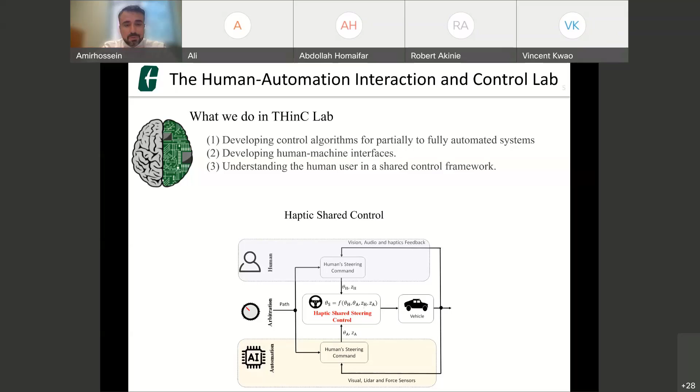The motivation behind this project is that human automation teaming is getting more and more interest because of the great promise autonomous vehicles have. For military applications, autonomous vehicles can increase personnel safety and mission performance. For commercial applications, we hope they can increase road safety, mobility, and quality of life.

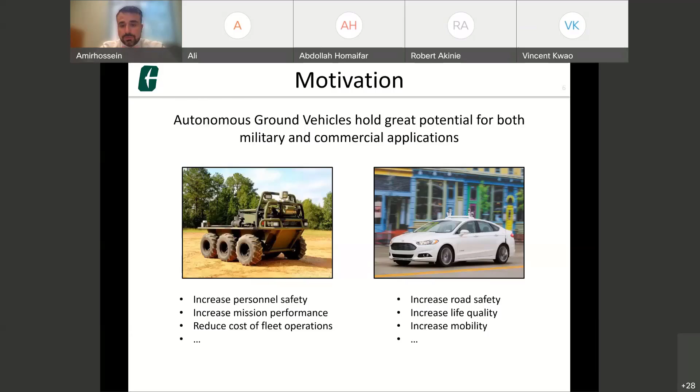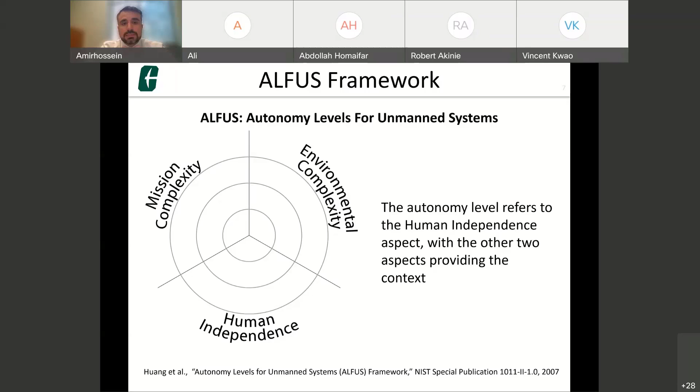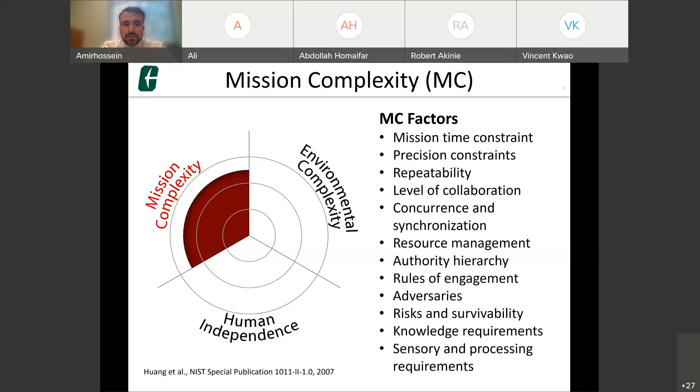There are many frameworks studying levels of autonomy. One is ALFUS, Autonomy Levels for Unmanned Systems. In ALFUS, we look at autonomy level with regard to human independence—how independent the algorithm is of a human user—and how well it addresses mission and environmental complexity. Mission complexity includes time constraints, precision constraints, level of collaboration, resource management, and risks. Environmental complexity includes noise, the dynamic nature of where the vehicle operates, obstacles and their size, whether obstacles are moving, terrain, and light—all of which pose challenges in designing an autonomous vehicle or autonomy algorithm.

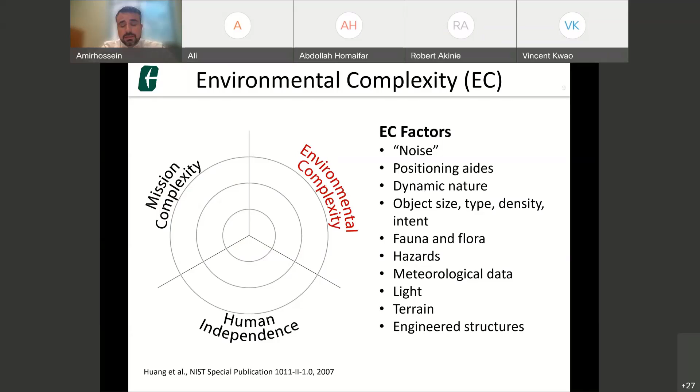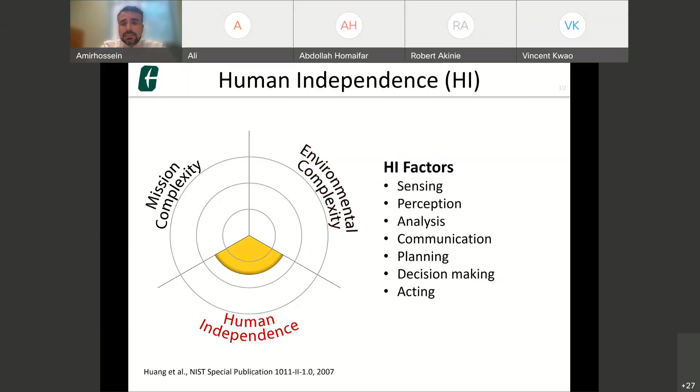With regard to human independence, we want our algorithm to be capable of accurate sensing, good perception, analysis, communication, and decision-making. So the goal for us as control and autonomy engineers is to design an algorithm that is independent of the human user and can address as much mission and environmental complexity as possible.

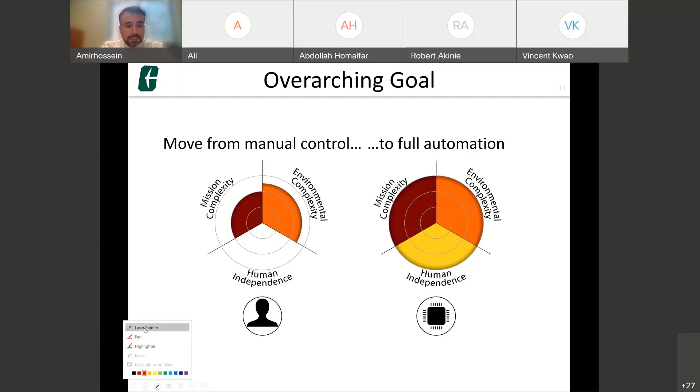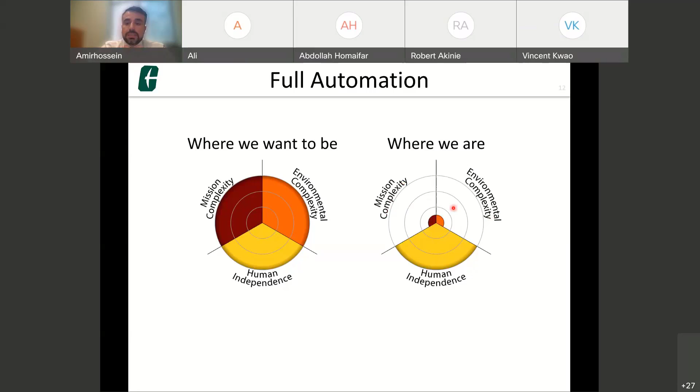However, what we have so far—our full automation systems—can only address a very small fraction of the problems regarding mission and environmental complexity. While we can work on improving our algorithms, it's important to also consider another solution: using the human user as a resource, an off-board resource, to resolve challenges that arise when autonomy is working in a new environment.

That's when the research question comes to mind: how should we merge the best of the two agents? How should we use human capabilities such as perception, judgment, and experience dealing with new environments, combined with the best of what automation can provide, such as precision?

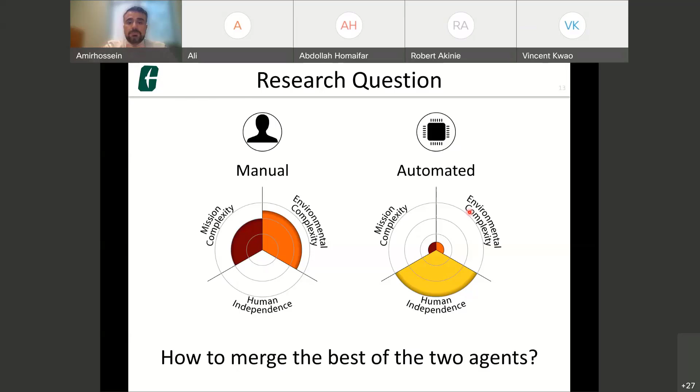I need to emphasize that adding human and automation may not necessarily lead to better performance, because humans and automation may see the world differently, and therefore may end up in conflicted scenarios. Because of these conflicts, we need to understand how to resolve them between human and automation, and how control should be transitioned between the two, or how control should be combined between human and automation.

For that reason, different shared control paradigms have been developed, mainly differing in the mechanism used for transferring control between the human and the automation system. The simplest paradigm is supervisory control, where the automation has full control of the vehicle and the human is basically supervising its actions. We don't really consider this a shared control paradigm, because the human and automation are not at the same level—they are not doing the same task; the human is just supervising the control.

One of the shared control paradigms is the switch-based paradigm. In this paradigm we can have two options. The first option is called active safety, where the human has control of the vehicle or the task. Here, with the vehicle and the task, we are always considering the steering of the vehicle.

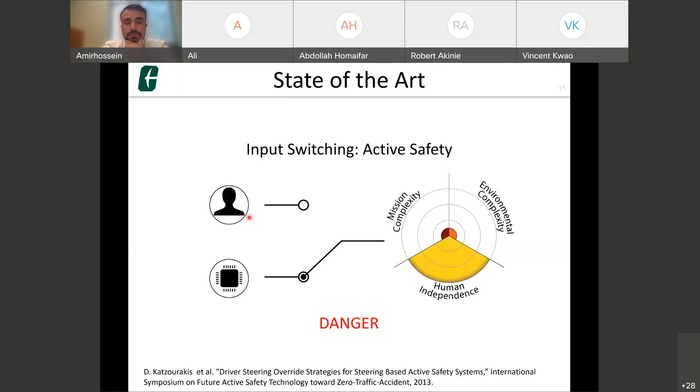So human normally has control of the vehicle, but in a dangerous situation, the controller will come and take control from the human. An example of this is the ABS brake system.

Another paradigm is what we call autopilot, where basically the automation is primarily responsible for performing the task. However, in a dangerous situation, the human can jump into the loop and take control from the automation, and that's what happens with cruise control.

The problem with these switch-based control paradigms is that it has been shown the transfer time between human and automation is a little bit long. Also, if one agent is not in the loop, it will be hard for that agent to understand the other agent has some problems or faults, and then jump in and take control from the faulty agent.

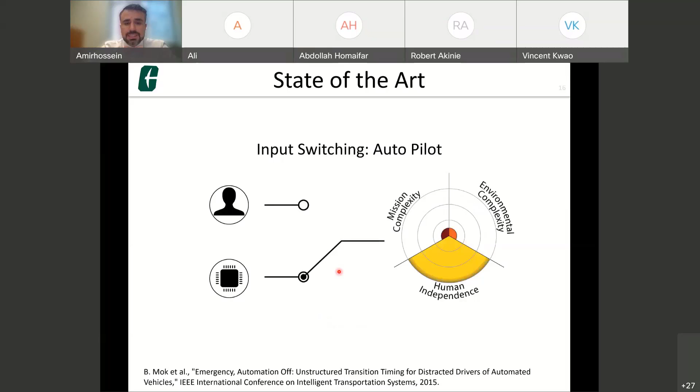So there is some misuse in using this switch-based control, and that's why recently people are thinking about combining human and automation's control commands continuously. One of the approaches people use to combine human and automation control commands is a paradigm called input mixing shared control.

In the input mixing shared control paradigm, the human command and the automation commands will mix through some weighted function, and that weighted function can be an adaptive function that goes between human and automation.

The problem here is that defining this alpha is normally done by some third party algorithm. Again, you can imagine what if that algorithm is not programmed sufficiently for these new complex areas that we have.

Another problem is that since the human is not directly connected to the automation, the human needs some additional process to understand automation's desire from the feedback given by the system. So processing that may be a little bit time consuming for the human to understand what exactly automation wants to do.

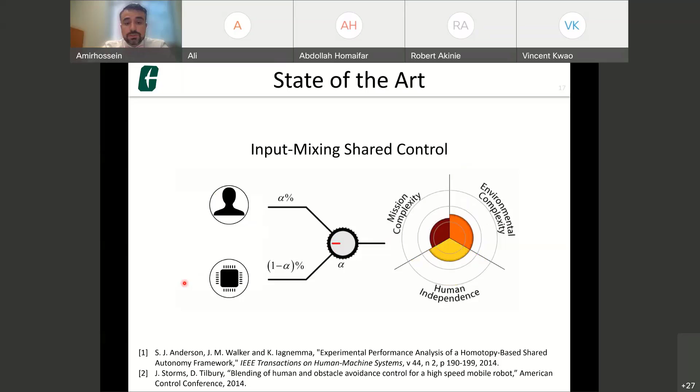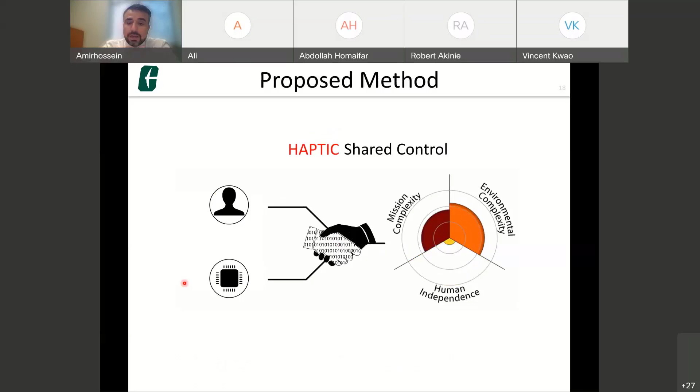That's why my research has been focused on the haptic shared control paradigm. In this paradigm, both human and automation apply their commands on the steering wheel.

The steering wheel, as a haptic interface, allows the human's and automation's dynamics to be coupled. This coupling allows us not only to apply our control commands, but also to sense what the other agent wants to do through the haptic feedback we get from the steering wheel.

Any questions? Yes, may I have one question? Sure. So basically with this mechanism, what you are doing in the previous slide, the blending mechanism you had, alpha was typically a constant value. Now you make alpha a sort of function of the haptic feedback. Is that what you're doing?

The difference is no. In the input mixing approach, alpha can be adaptive, can vary in time, but the mixing is happening in the vehicle, on board. What happens is the human has its own steering wheel, automation has its own steering wheel, and the steering commands of the human and the automation both go to the vehicle and get combined through some mechanism, and then the human gets this feedback back.

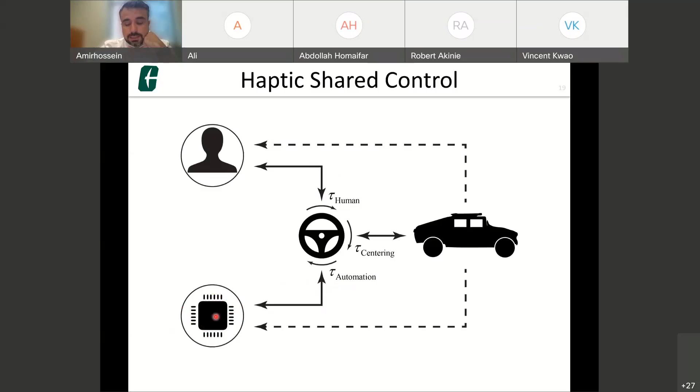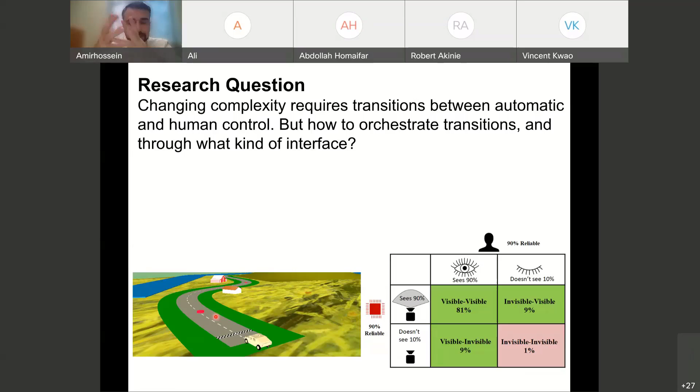So we are looking at automation here as, instead of having an infinite impedance or a motion source, we are looking at it as a source with a limited impedance. So the first question we wanted to ask ourselves is basically: when there is complexity in the system, and a need for transition of control between human and automation, because both human and automation are subjected to errors, which of these shared control paradigms is the best paradigm for us? So our first objective was quantifying the benefits of haptic shared control in comparison with alternative shared control paradigms.

This transition of control is important because we are interested in scenarios where there is a need for transition. If you assume your human agent is 90% reliable and your automation is 90% reliable, for a task like obstacle avoidance, maybe 81% of the time both human and automation see the obstacles and can avoid them. But there's 18%, split 9% and 9%, where one of the agents is not capable of seeing or has some fault. There's even a 1% where an accident may happen, which is why the material of the vehicle should also be researched. But what we're doing is saying: if we design a very good, very intuitive shared control paradigm, we should be able to improve the performance of the system from 81% up to 99%, if our shared control paradigm works perfectly.

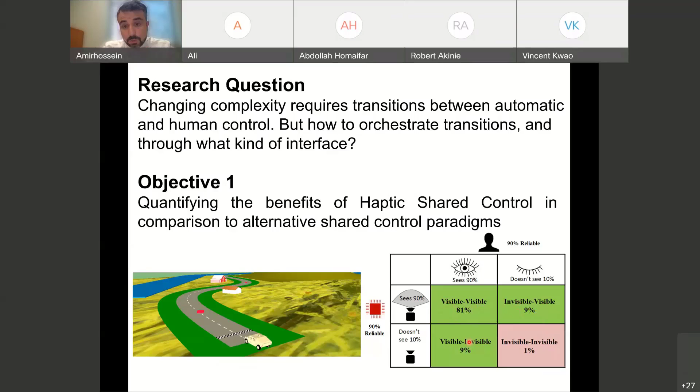For that reason, we did a case study using a fixed-base driving simulator. This simulator has a motor and a motorized steering wheel, where the automation's commands come through the motor and control the steering wheel. The steering wheel has an encoder and some torque sensors. The torque sensor is a differential torque sensor that determines the difference between the torque applied by the motor and automation and the torque applied by the human, which tells you a bit about whether they are in agreement or disagreement.

If this differential torque is high, it means the two agents have some disagreement with each other. The task for our participants was to drive a vehicle, track the center line, but also avoid obstacles. The path is shown here, and this simulated model is built on the Simulink virtual reality toolbox.

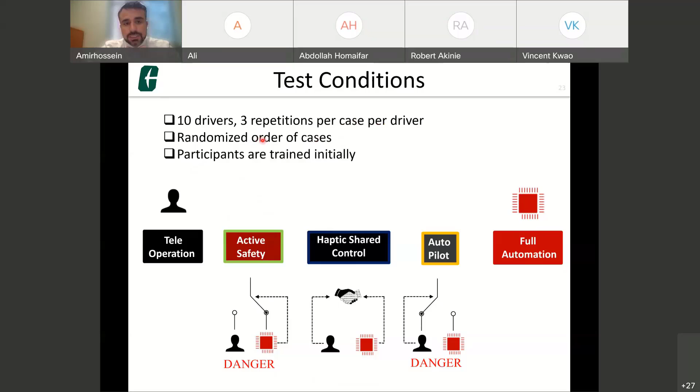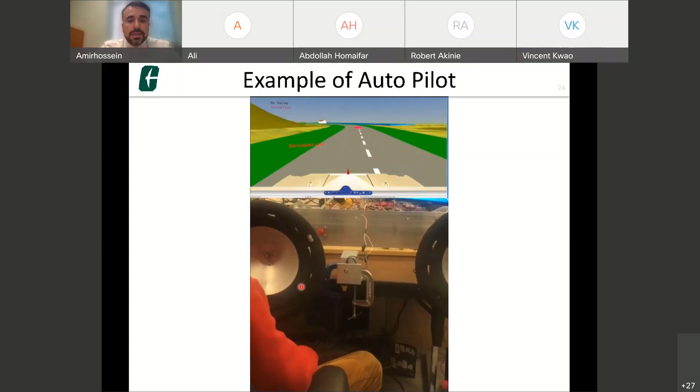Next, I want to show you an example of the autopilot case. Here the automation is in control of the steering wheel. But when a human wants to take control back, they can put their hands on the steering wheel and apply a quick jerk. This is a similar mechanism to what Tesla does, and the human can re-engage the automation by clicking a button. That's an example of the autopilot automation.

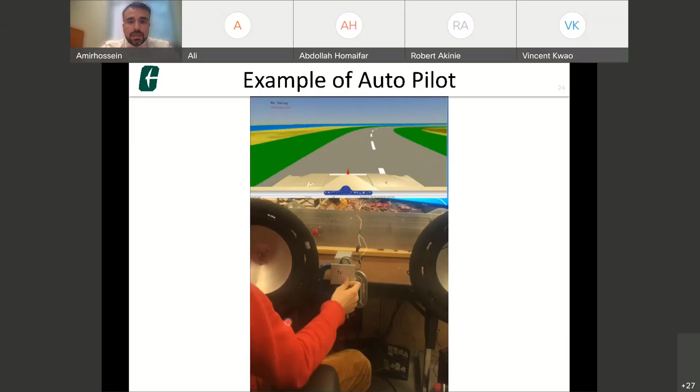Let me show it one more time: automation is on, controlling the vehicle, and whenever a human wants to take control, they apply a quick jerk, the automation goes off, the human clicks, and the automation comes back on, and then you try to come back to the center line and avoid the obstacles.

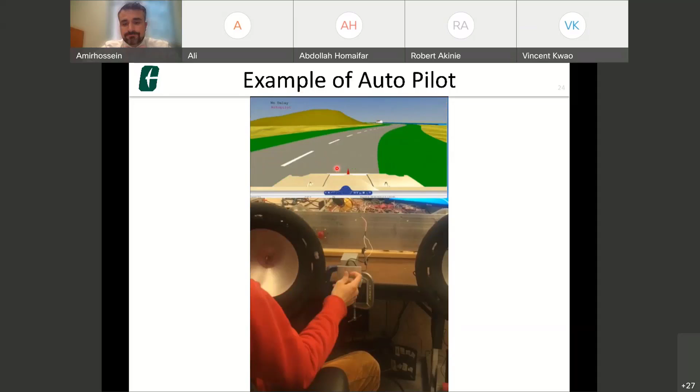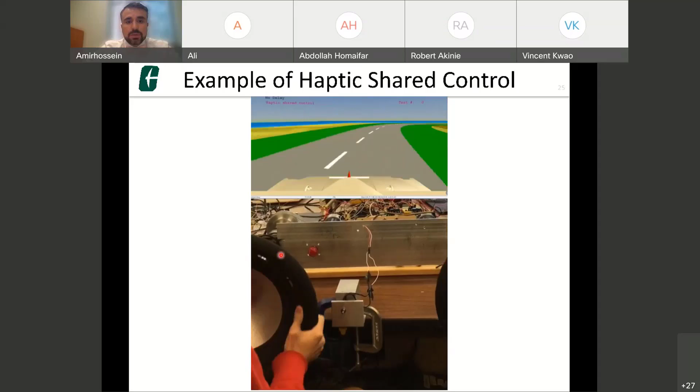This is an example of haptic shared control. It's very hard to see, but in the haptic shared control, there's a motor that applies torque on the steering wheel, while the human's hand is also on the steering wheel. Whenever the human wants to take control, they can tighten up their muscles and take control from the automation system.

The automation is always running in the background, so there is no engagement and disengagement here. Because we wanted to model faults in human and automation, we considered that there are 10 obstacles on the path: 6 of them visible to both human and automation, 2 visible only to the automation, and 2 visible only to the human, where we don't pass that obstacle information to the automation system.

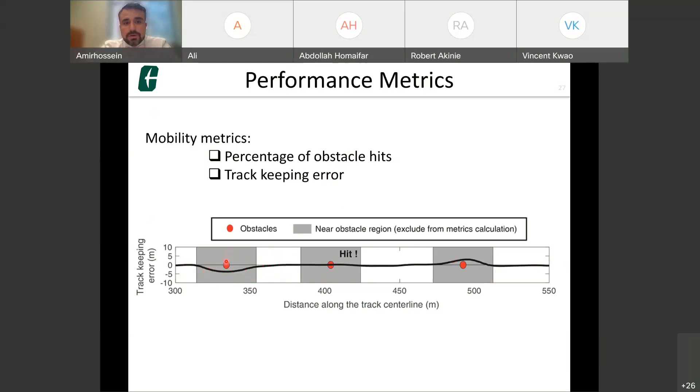Comparing results, we looked at the hit percentage - the number of obstacles that were hit - and the error. For the fully manual, teleoperation, and fully automated conditions, since we engineered 2 out of 10 obstacles to be invisible to them, we get a 20% hit rate.

However, with shared control paradigms, we saw that in the haptic shared control, the number of obstacle hits is significantly smaller than the others, especially compared to active safety. This star indicates a statistically significant difference based on an ANOVA analysis.

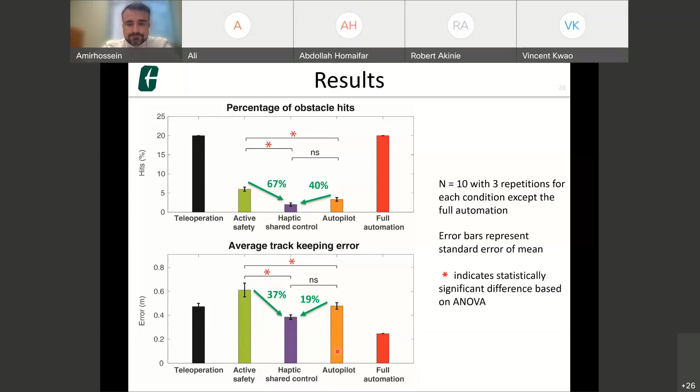For the error, fully automation has the lowest error, but comparing the three shared control paradigms, the haptic shared control has a smaller error than active safety and autopilot. This shows that adding automation through haptic displays can improve lane keeping and obstacle avoidance.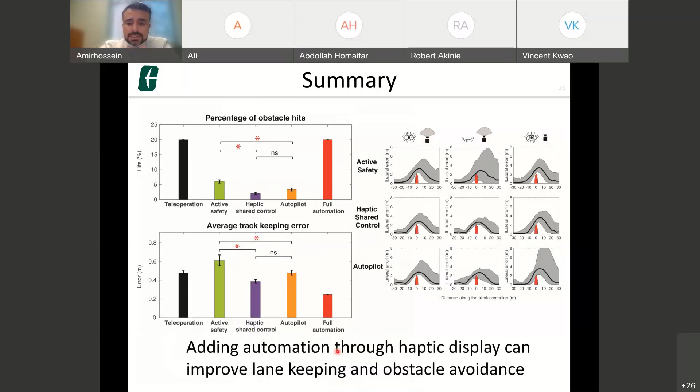But we were interested to look more carefully at how human and automation interact in these shared control paradigms, and I want you to look at these results.

These results show the paths of all participants going through an obstacle that is visible to both human and automation in the active safety condition. We plotted all participant paths for each case: active safety, haptic shared control, and autopilot.

Sorry, do you have any questions? No? Okay.

And then for the cases when there is no fault, when there is a human fault where the human cannot see the obstacle, and when there is an automation fault - one specific case I want you to pay attention to is the autopilot.

Autopilot is the case when automation is in control and the human takes control from the automation if they realize it isn't performing correctly. There is a low approaching distance for this case, meaning the human was not really prepared to take control - they realized a little too late that the automation had a fault and they needed to take over. This shows up as a low approaching distance and a high confidence area here.

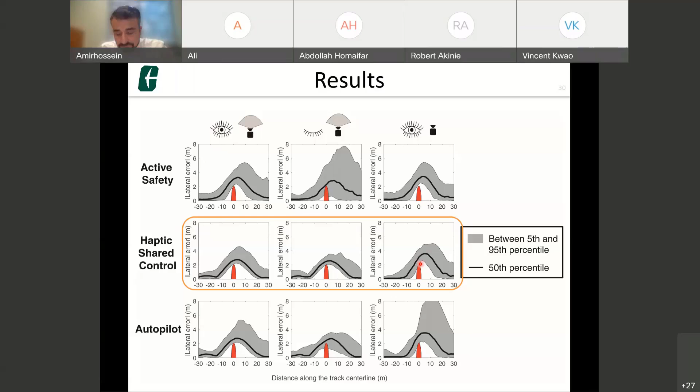For that reason, and we also realized that looking at the case where the automation and human both see the obstacle, but they may have different preferences on how to avoid it, it might be a dangerous situation. Previously we always thought that if the obstacle is visible to both human and automation, that's an easy case to solve. But when we were doing the simulation, we realized there are cases where the human decides to go from the left and the automation decides to go to the right. Because of the haptic shared control paradigm structure, those torques cancel each other out, and the vehicle may hit the obstacle.

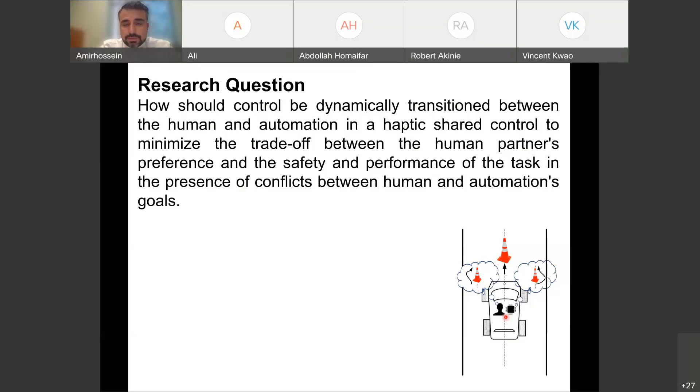That's why we thought, okay, let's rethink and design an adaptive haptic shared control paradigm. The research question for us was: within haptic shared control, how should we minimize the trade-off between what the human wants and the safety and performance of the task? The objective was to develop a modulating mechanism for the automation's impedance controller gains to enable dynamic transition of control authority between human and automation.

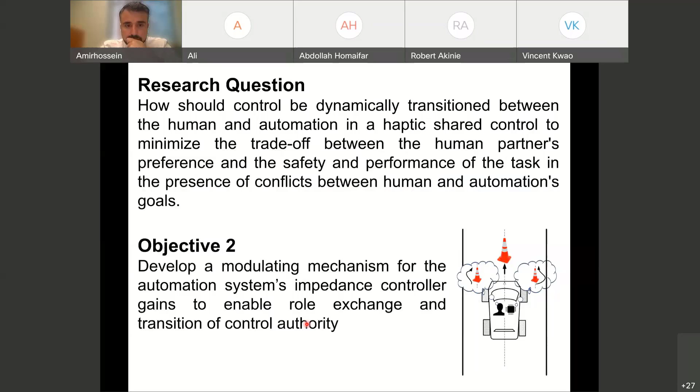So, sorry, may I have one question? So far, before this objective, the human was in control of how much haptic feedback is being applied. Now you're going to have an external algorithm to balance the human input and the automation input, correct? Yes. So I am gonna... okay.

Let me go through this slide and I'll answer you right now. In a haptic shared control paradigm, we have a motorized steering wheel where the human is controlling the steering wheel and automation is also controlling the steering wheel. Normally the automation controls it through some impedance controller, you can assume like a PID controller.

So what we did is consider the human as a two-level controller: a higher level controller, in the brain, where you determine your intent to go left or right, and a lower level, the biomechanics, where you apply the torque on the steering wheel. By modulating these gains, the stiffness and damping in the muscles, you can take control from the automation or yield it to the automation.

Previously, in the haptic shared control paradigm, we set the parameters of the automation system, the PID controller, as constant gains that didn't change. So if the human wants to take control, it should increase its gain ZH to be more than ZA. And if it wants to yield control back to automation, it should relax so ZH becomes smaller than ZA. This ZA was fixed.

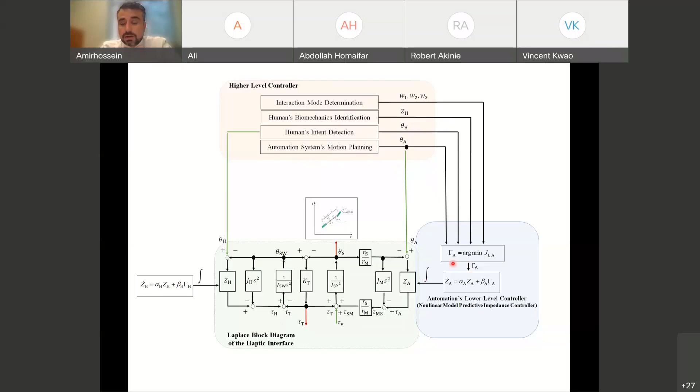Having this knowledge available, our goal was to determine gamma A, the optimal modulation policy. So the cost function that we defined here,

it has three terms. The first term focuses on how far the steering angle is different from the human. The second is how far the steering angle is different from automation. And then the question is what is the disagreement between the two agents, which is subjected to the dynamics of the human-automation interaction on the steering wheel.

You can imagine there are two possible interaction modes. When automation decides that WL1 is bigger than WL2, it gives more weight to the first term - it is basically in the assistive mode, trying to give control to the human. When it is in the active safety mode, WL2 becomes bigger than WL1.

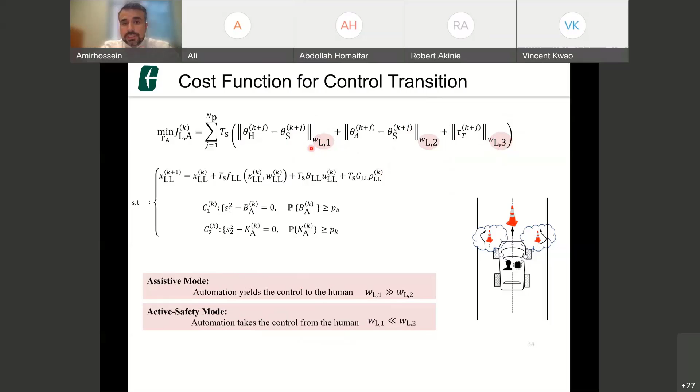For now we consider these weights as constant, but in the future we are hoping to determine some adaptive law for modulating or changing these W's adaptively as different scenarios continuously happen.

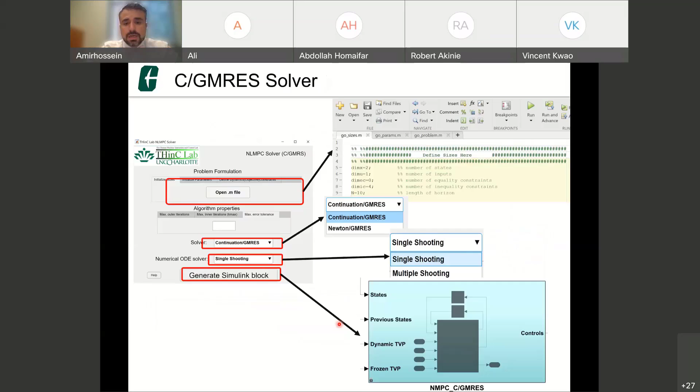We used C/GMRES, which is an iterative solver for solving nonlinear MPC problems. We adopted and solved our nonlinear problem using it.

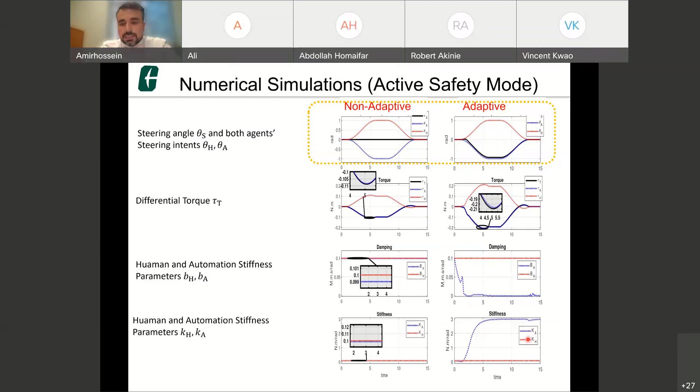We tested our algorithm and solver through a processor-in-the-loop test to make sure we could run it in real time. We looked at the horizon view and the iterations happening at C/GMRES, examining two cases.

We used two microcontrollers - Arduino Mega2560 and STM32F4 Discovery. Using both, most of the time we were able to run our algorithm in real time. There are two cases where the execution time is more than 1 millisecond, and we are assuming that if execution time is less than 1 millisecond, it is acceptable for us.

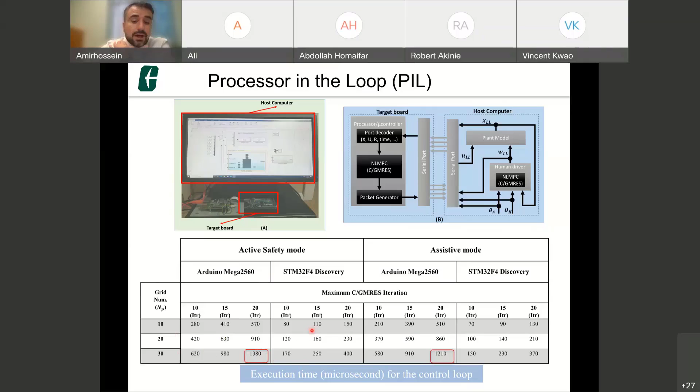But in the majority of the time, our solver was able to produce an optimal modulation policy in real time.

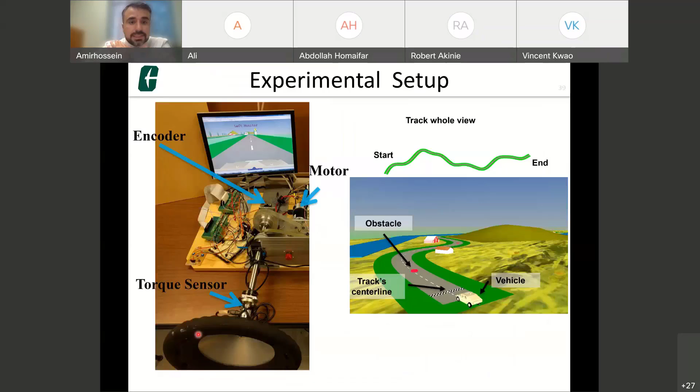We did some test studies, which we just recently started doing this last month. The problem and experimental setup are almost the same, and we decided to compare non-adaptive haptic shared control with adaptive haptic shared control. In the non-adaptive case, ZA is constant, but in adaptive, ZA changes with time. We had one driver, with one repetition per non-adaptive case and two repetitions per adaptive case. We again considered 10 obstacles: 6 are visible to both agents, 2 are only visible to automation, and 2 are only visible to the human.

Here, we used grip force as a proxy for human impedance, because we do not have a direct measurement of human impedance yet. Basically, if a human wants to take control, they are probably holding the steering wheel tighter, and if they want to yield control, they loosen up and hold the steering looser. The relationship between grip force and ZA is through this equation: when grip force is very small, meaning the human is not really holding the steering wheel, ZA is high, and when grip force is very big, ZA becomes very, very small.

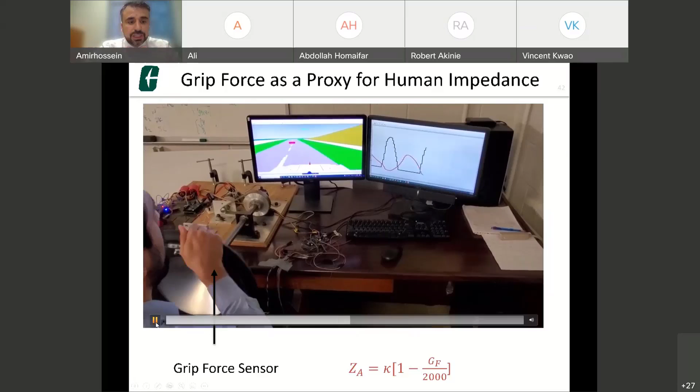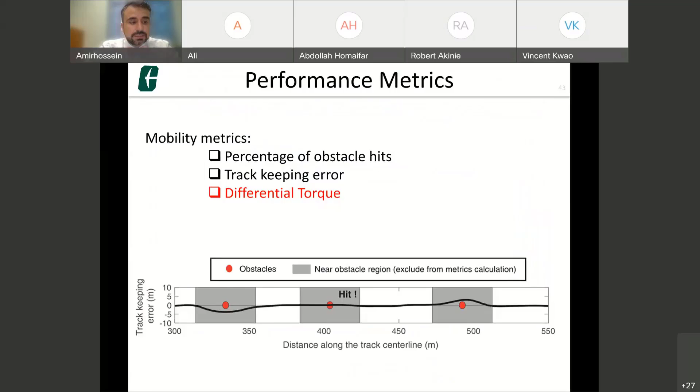Yeah, so we did this test again. Besides the other mobility metrics we had before, we're now looking at the differential torque. Looking at the results, when talking about non-adaptive haptic shared control, we saw that it had this low approaching distance, but this has been removed a little bit in the adaptive haptic shared control paradigm.

So I believe, as soon as the human understands that automation has some fault, they try to take control and hold the steering wheel very tight, and instead of fighting back, the automation understands that the human wants to take control. It reduces its involvement by reducing ZA, and that's why the human, without any fight, can control the steering of the vehicle, rather than needing to increase force and overcome this bias force.

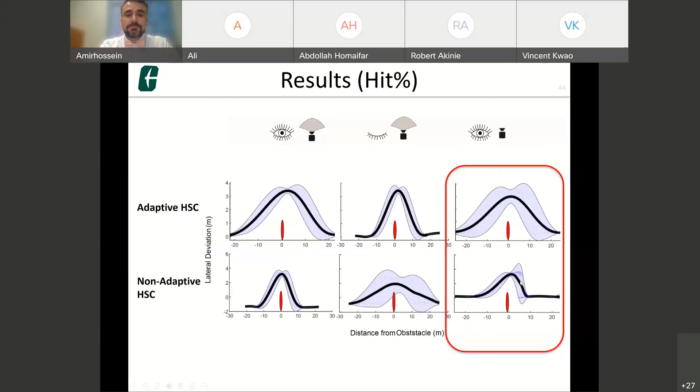Looking at the differential torque, we saw a significant difference when the obstacles are visible to both human and automation, between the adaptive haptic case and non-adaptive haptic case. We didn't see that much difference in the other two cases when there is a fault in one of the agents. We need to do more analysis on this matter and increase the number of subjects to more accurately see why the differential torque is not changing that much.

But in the adaptive case, when there is no fault, adaptive haptic shared control obviously has a much smaller differential torque, meaning there is less disagreement between human and the automation system.

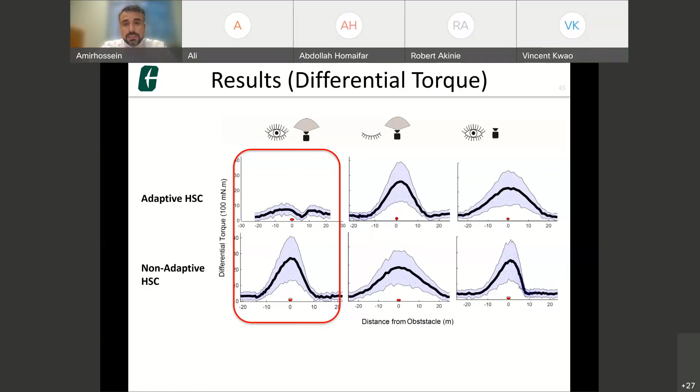As I said, there are a couple of directions we're currently working on. One is developing a more sophisticated model of human-automation interaction. Basically, you can model the human-machine interaction as x dot equals f plus g, where f is a nominal model of human-machine interaction, same as our mass-spring-damper, for instance. Then there is uncertainty in the model and in the variables of the human, which can be state, input, and parameter dependent. We are applying estimation approaches like unscented Kalman filter-based methods to identify our f and identify the parameters of the human model.

And then we also apply some learning-based approaches, like a Bayesian neural network, to characterize the uncertainty in the system. This is one of the projects we are currently working on.

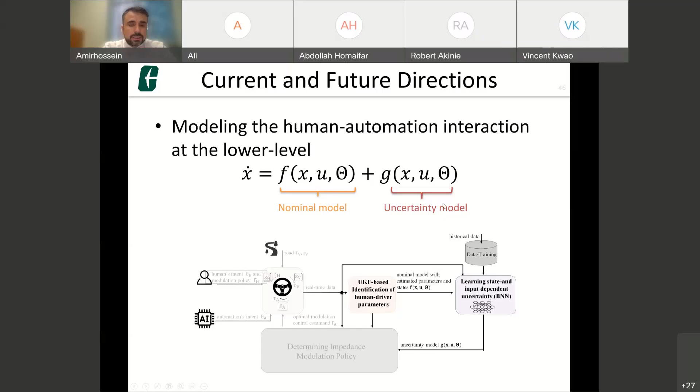The other project we're working on is studying the role of convention, meaning how human and automation basically interact with each other through repeated interaction. We assume this cost function for the automation system, but the human can have its own cost function, depending on how the human selects weights for its terms. The human can have selfish behavior, meaning they want to take control all the time, or selfless behavior, or neutral behavior. This behavior can also apply at a higher level when the human is deciding about their intents.

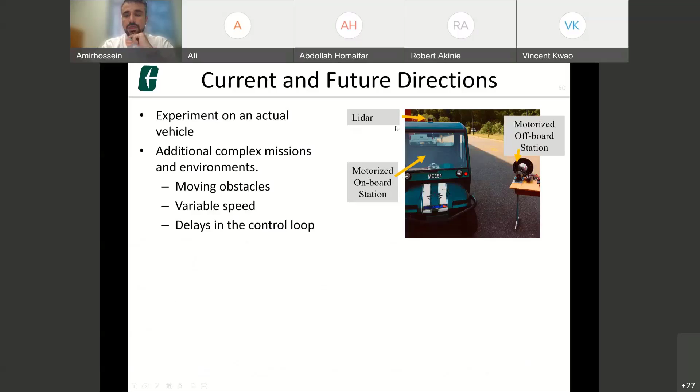And then for the other partner, how we can reach the other equilibrium point. We are also hoping to use this experimental platform on a ground vehicle. We have motorized this golf cart, with an off-board and on-board motorized station, and a LiDAR, GPS, and everything.

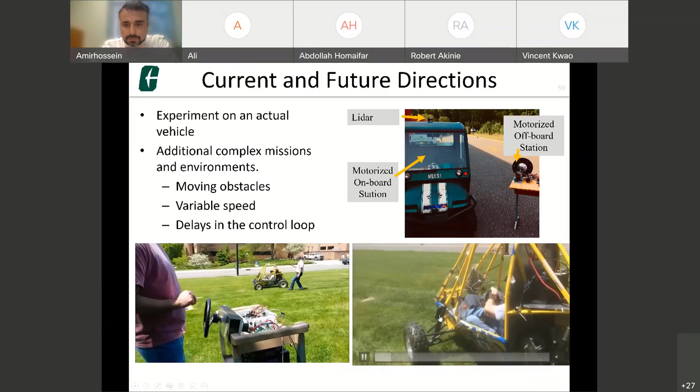I want to show you this small video from the car that we had at Michigan. It was basically the same idea here. These two steerings are communicating through radio communication.

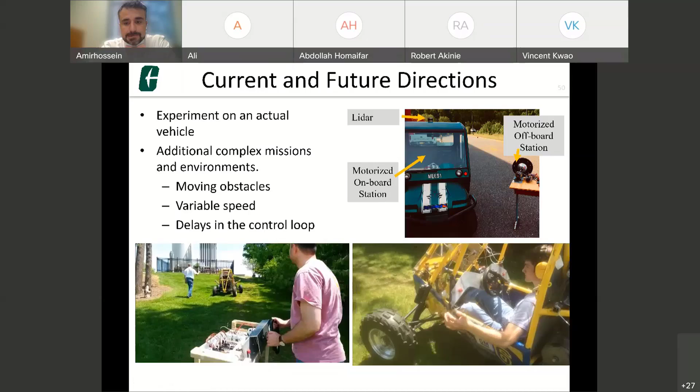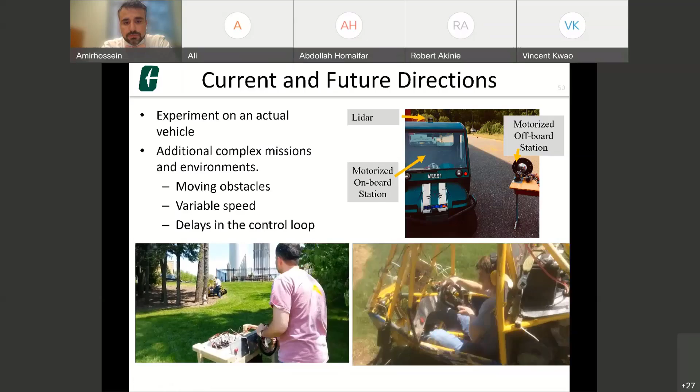So here the off-board can control the on-board. We call the second agent the wizard, or the automation. It can control the vehicle, and we have this bilateral communication between the two agents. When they are interacting, both of them feel whatever the other agent wants to do.

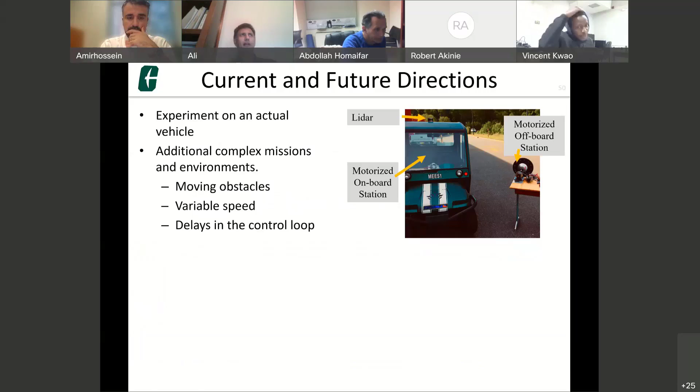Very interesting talk, especially on the part where you try to come up with adaptive haptic shared control. However, there's a concern there: the human is competing with another agent which now has a role that can change.

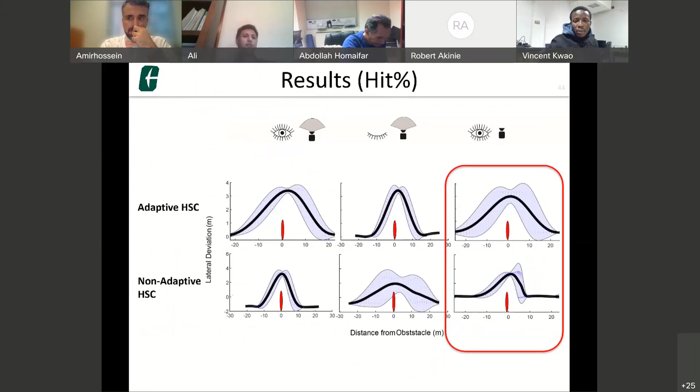In the case that it wasn't adaptive, the human already knows what is going to be the action of the controller on the other side. Now it's more that the human has to learn on the spot how the controller is going to react, in order to adjust.

For example, if the human goes based on what they're guessing, they may apply too much force, and then the adaptive control tries to give control, and now it might end up with quite a huge input to the system. Because the human is going to go by what they've already learned about the impedance of the controller, and that may create confusion on the human side.

Let me give a more intuitive sense of this. Have you ever tried taking off your shoe and trying to push the pedal? It takes you quite a long time to learn how to drive without shoes.

And that's pretty much a small bias in the control input you're applying to the pedal. Not having a shoe completely changes the environment, but it's only a small bias. It's not that much nonlinear behavior being added into the loop.

Now this is a quite different situation, where the agent is behaving in a quite nonlinear way, and it's quite complex. In that situation, how should the human learn to properly act when the other agent may compete or may be willing to give up control? That sort of situation could create some problems. That is very true.

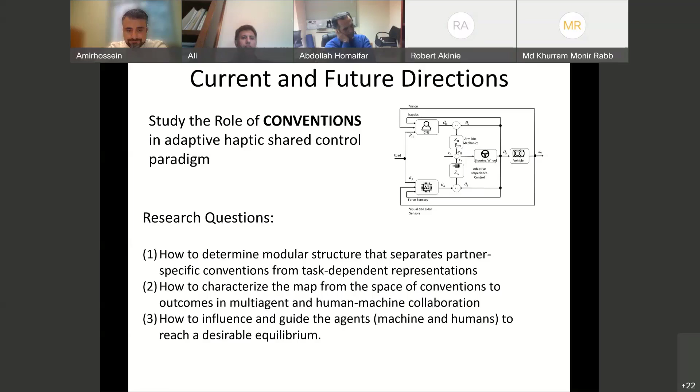My question is, at a high level, how does the control shift from human to robot or robot to human? Because when we are tracking a trajectory, we need to make very smooth transitions to follow that trajectory. But in your video I see that when the human has taken control from the agent, there is a sudden change, a sudden jump in the trajectory. And that is happening because your car is moving very fast, and it reaches some non-stable situation. This is one problem.

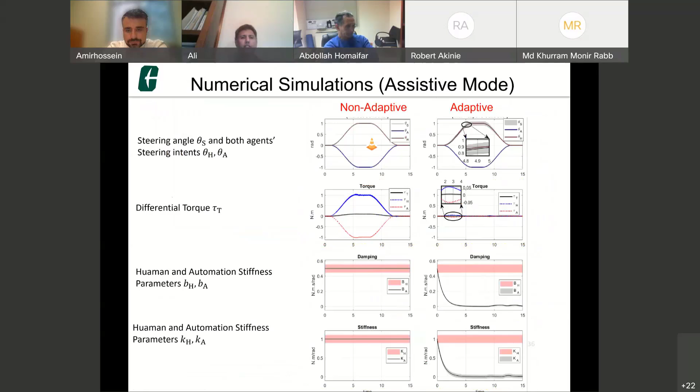I think that happened after the first video, where the driver passes back control to the automation. That is, well, you are right, that is... okay, you are right. In this experiment we did here, we set the velocity of the vehicle to be constant.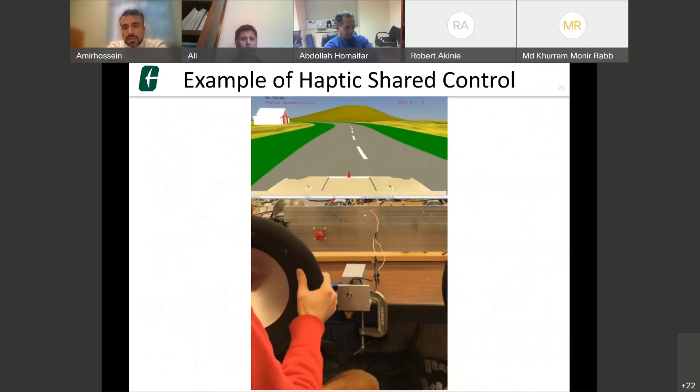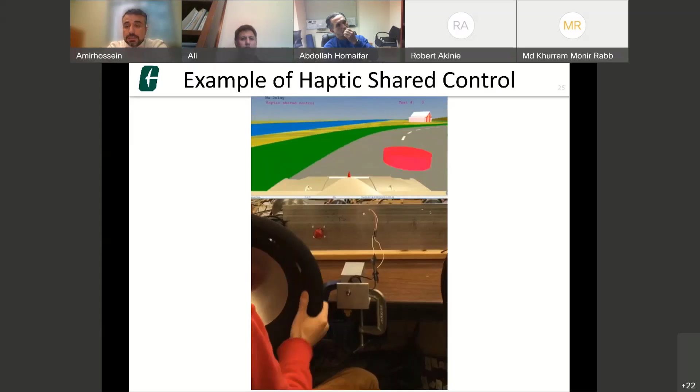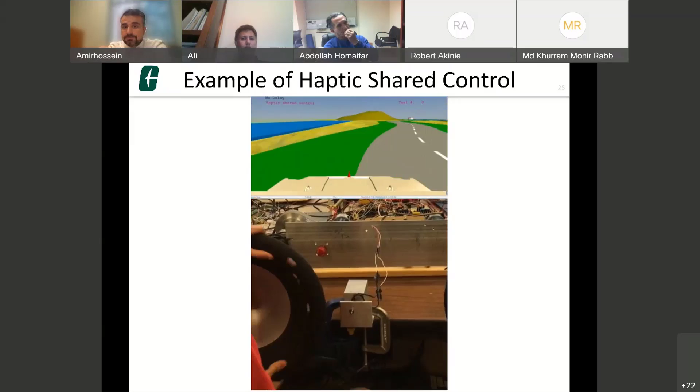Obviously, when designing this transition and control between human and automation, we are only focusing on the steering control, and we are decoupling any type of velocity control from it as well. However, one aspect we need to consider is that when there is a transition happening at the steering level, we need to consider adaptation of the velocity, so that again, you're right, we have a smooth path and don't have such a deviation from the tracking.

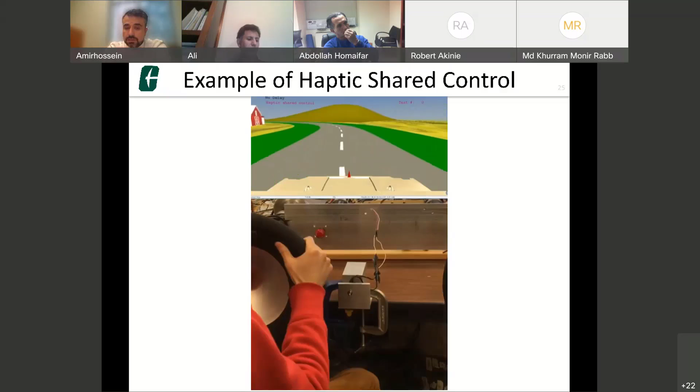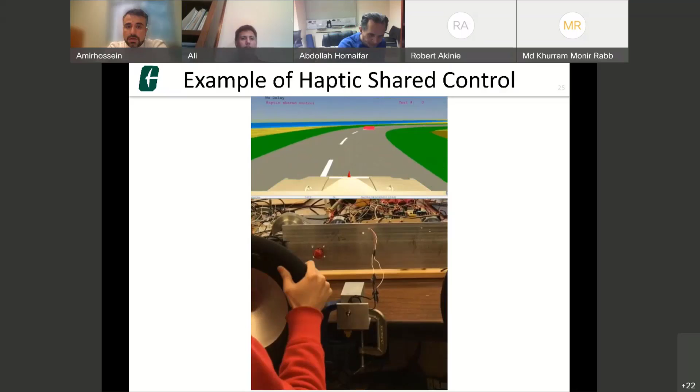We didn't do it in this study. This study was just fixed for the velocity of the vehicle. But when you're doing the transition, one of the research directions we are proposing right now is that when this transition is happening between Z_A and Z_H, there should be adaptation in theta_A as well, and how this theta_A needs to be. By theta_A, I mean just the steering level, but again the velocity and other aspects should also be considered.

So we need to couple, we need to add this cost here as well when this transition is happening. But for us, we didn't — we only kept the velocity constant, and that's why you saw that behavior. But yes, you are right.

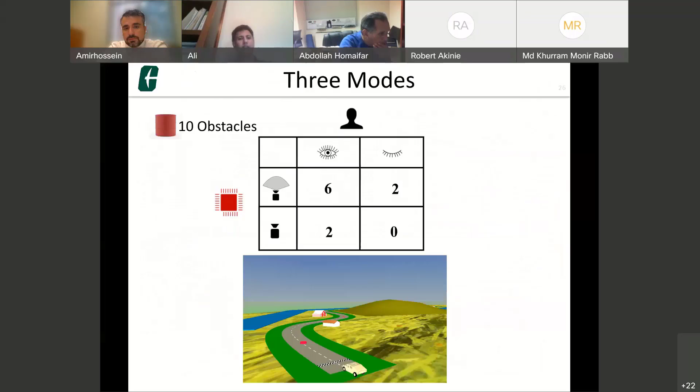And as a follow-up question, you defined at least 3 modes of operation. How do those modes change between fully autonomous, active, and so on? So how do you decide which mode the car should be in?

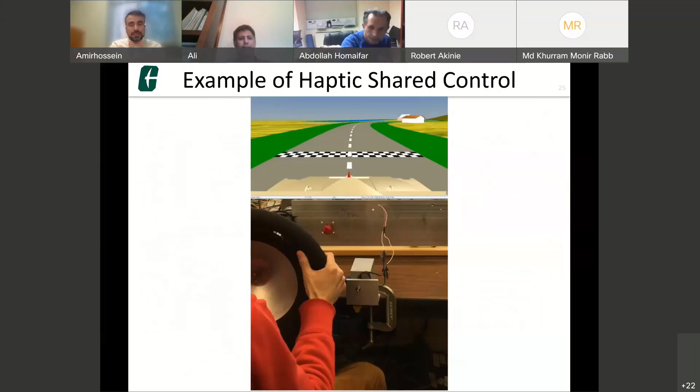That is part of what I said is subjected to future studies, but you are right. For our case studies, we set three distinct behaviors: one run was active safety, one run for haptic shared control, one run for autopilot. We didn't tell the participant which shared control paradigm they were working within, but we knew how automation is active.

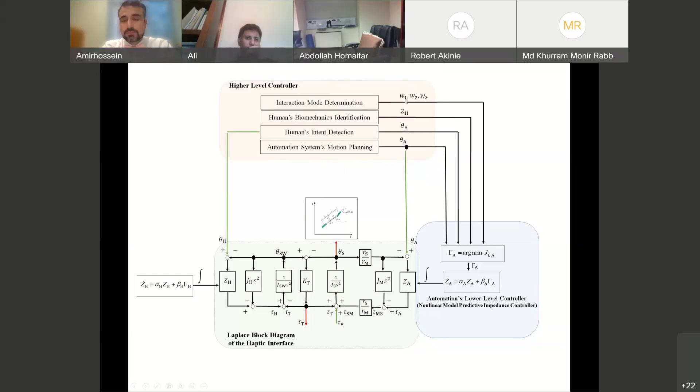In reality, between active safety and autopilot, there's basically a continuation between these two. That can be set by the weights you select for your cost functions. If you select your weights such that WL2 is bigger than WL1, for instance, this is active safety and this is assistive mode.

One approach I believe we can take is data-driven approaches, designing reinforcement learning approaches where it gets information about human-machine interaction, information about the environment, information about individual agents, and based on all that information, it selects the correct WL1, WL2, and WL3. That's one approach I'm thinking about. We haven't studied it yet; it's part of a convention-based project we're thinking about.

Selecting these Ws and changing them continuously is something that needs to be done. I think we recently worked on interesting results on how we can have these operating modes and levels of autonomy adjusted automatically, so we can discuss later to see how we can find synergy here.

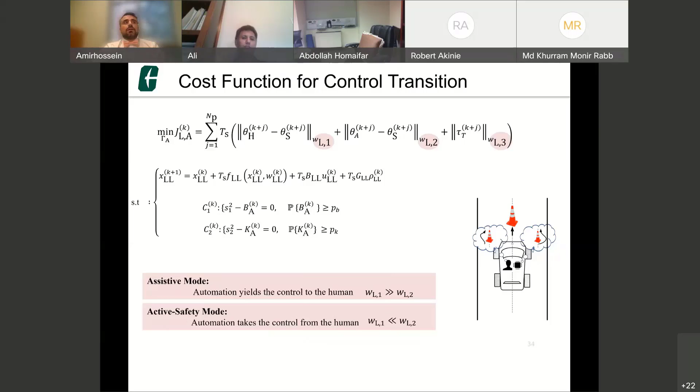No, yes and no. We believe with haptic shared control, one disadvantage is that the human's hands should be on the steering wheel at all times. With hands on the wheel at all times, the human is always in the loop. Even if not applying large torque, being very passive, the human is still in the loop. But the way we define it, if the human's hands are off the steering wheel, then the human is out of the control loop.

We think having the human hold the steering wheel, with it moving, gives the human muscle memory of where the steering is, even if their intent isn't there or their eyes aren't on the road. That is beneficial compared to not having hands on the wheel and then jumping in to take control.

But we know that honestly, for commercialization, it may be a bit more annoying to always keep your hands on the steering wheel if you want to buy an autonomous vehicle. So that's a limiting factor, but we've seen that if the human is in the loop, which haptic shared control ensures by keeping hands on the wheel, then the transition happens smoother and people understand their roles better.